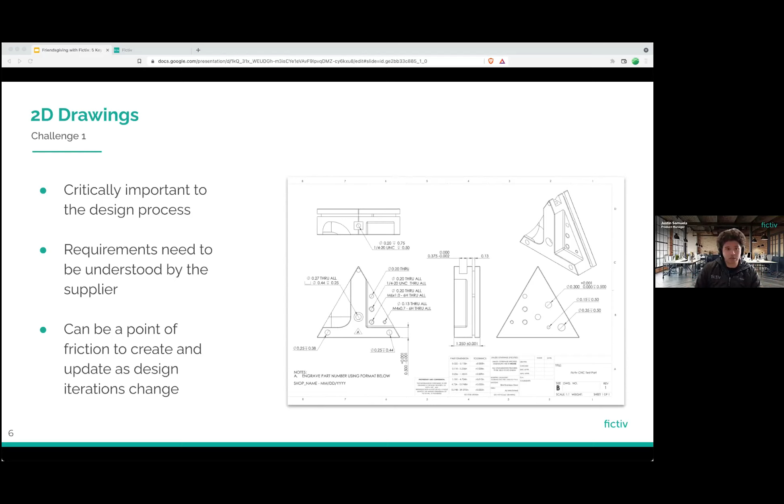Based on this understanding of drawings and their importance, we've been working to improve the drawing support that we've already had for a long time. Throughout this year specifically, we've added the ability to view, generate, and annotate drawings right within the Fictiv platform. Annotations are great for the times when you may have forgotten to include something in your drawing, or want to remove a requirement that's perhaps causing some difficulty—maybe increasing cost or lead time to a level that's not right for you.

Generation is a great tool for those times when you haven't created a drawing yet in your process, and you need to call out maybe a tolerance you've overlooked, or realize needs to be included in a drawing, or maybe something simpler like a thread detail, or you'd like to request some sort of post-process. Conveniently, when you marry these two things together, you can generate a drawing directly from your 3D model right on the platform, and then annotate it and get that quoted. So just trying to make things simpler.

But all of these things are meaningless in some ways without properly understanding what's in a drawing. As a result, Fictiv has had a capability that we've been using since 2018, which is that we're actually analyzing 2D drawings to detect requirements and details. This allows us to actually understand the drawing. This helps ensure the quotes are accurate, but most importantly, it helps prevent delays in the manufacturing process for things that may not have been accounted for if you weren't looking at the drawing.

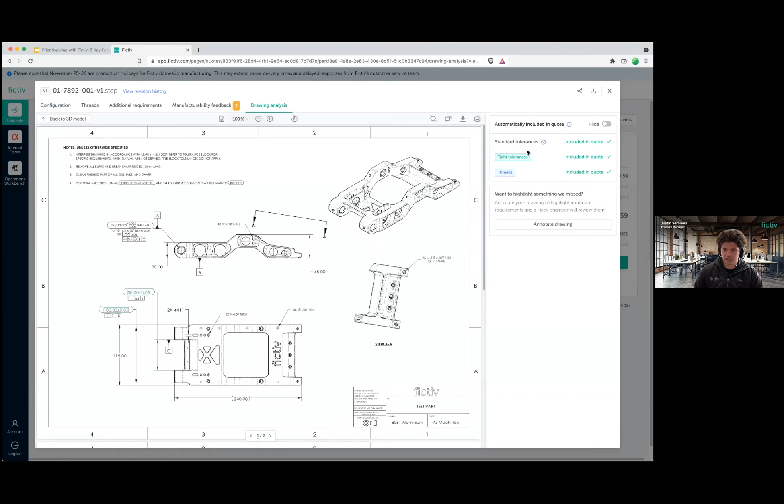Specifically, where we've got the technical drawing section over in the right-hand column, you can see that stuff is now in green. It says your drawing has been automatically reviewed and your part is ready to purchase. It's also got this button here calling your attention to it, which says review the drawing analysis. If I click on that, it flips over and shows me some of the things that are now included—explicit callouts to say standard tolerances are included, tight tolerances are in this green box type, and threads are in this blue box type, and all of those things are included and accounted for in your quote. If you're ever missing this, you can always get to it from the drawing analysis tab up top.

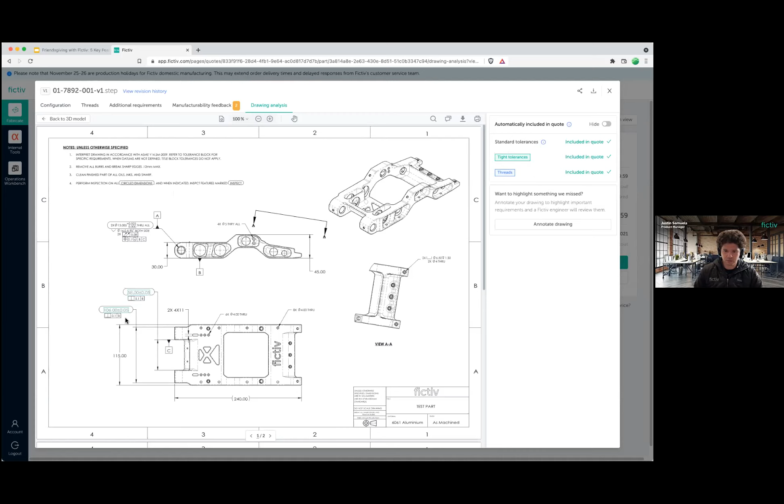But if I now look at my drawing, there's some new things here. You can see that we've got a green box around these tolerance callouts, which are highlighting tight tolerances that we've detected in your drawing. And if I scroll down further, not only do we have more tolerance callouts, we've got threads that have been detected.

All of this is meant to show you some of what we understand from your drawing. And we'd like to make sure to highlight that if there's something we missed, we direct you to annotate your drawing. You can do all the traditional annotation features—arrows, lines, circles, different color options, that sort of stuff—to actually annotate a drawing. Once you request it, it'll get reviewed by a Fictiv manufacturing engineer, just to make sure that everything is A-okay and as you want it.

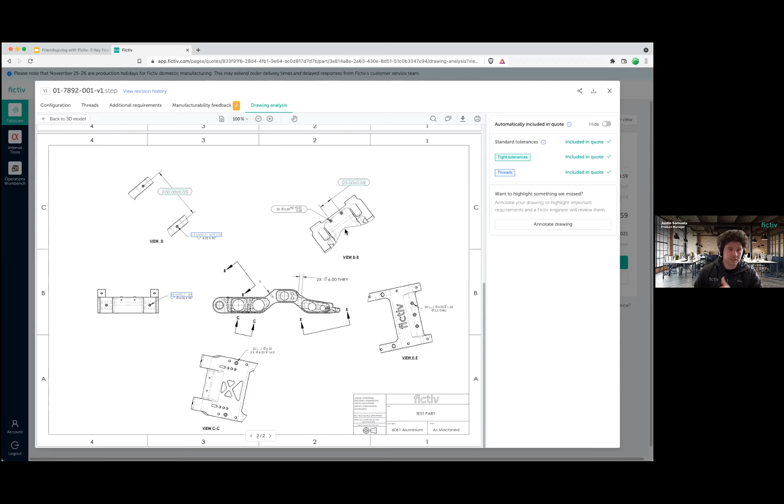Now, I'm going to highlight one other detail that's included in this drawing over here.

In this instance, you can see that this technical drawing section is highlighted in an orange color to call your attention to it. It says additional requirements were detected in your drawing that require configuration.

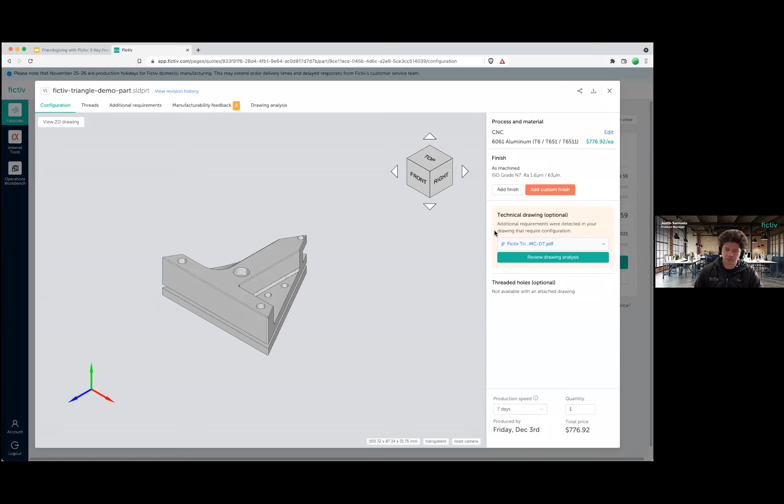If you click on the drawing analysis button, you can see that we're calling out that we detected a COC and a material cert in your drawing. Right from here, you can click to add those to your part. If I do this quickly, you'll see what happens.

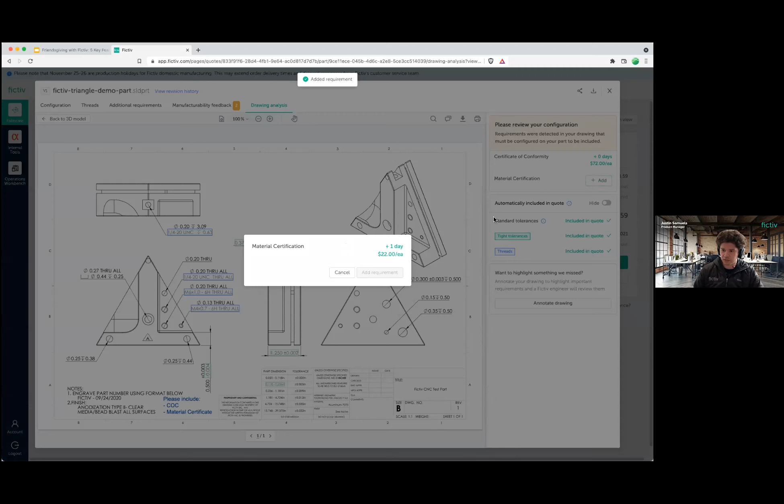Now this turns green, and that's all great to make sure we've accounted for everything. If we go back over to the configuration tab, you can see that this is now saying your drawing is automatically reviewed and your part is ready to purchase. So you're all squared away.

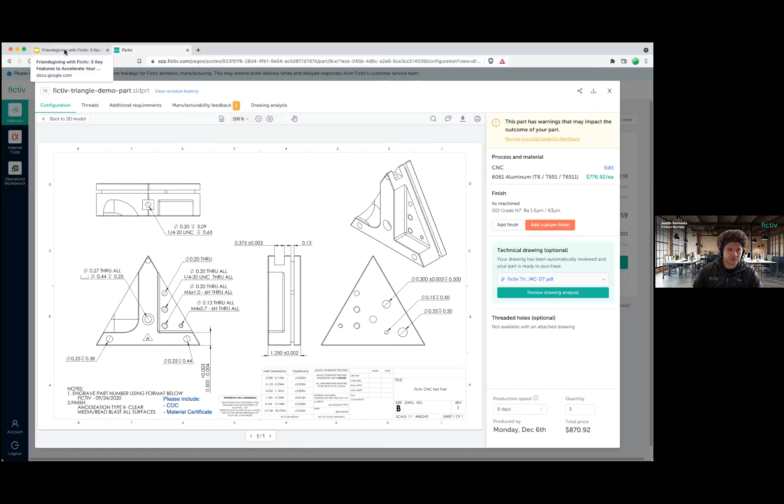So that is the new drawing analysis feature. With that, I'll jump back into our presentation and we'll keep on rolling. If you have any questions about the drawing analysis feature, how it works, feel free to put those in the chat and we can come back to them when we get to the Q&A portion at the end.

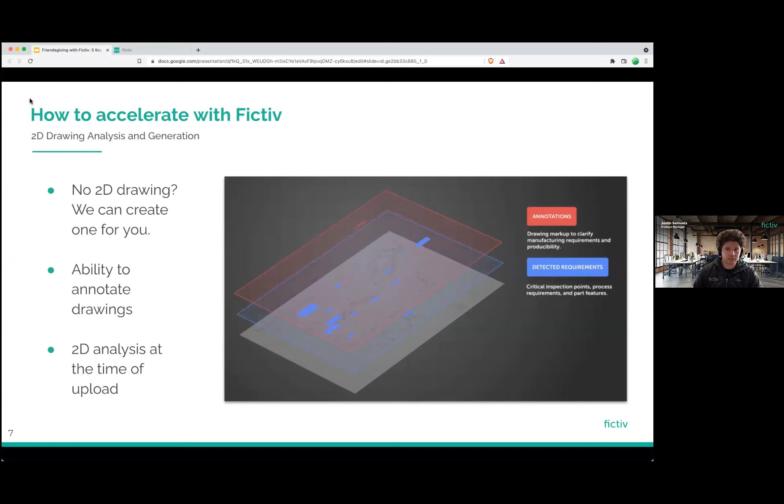Next up, we've got IP security. So I'll hand it over to TJ to take us through that. Thanks, Justin. Very good stuff on the drawing analysis feature. Happy almost Thanksgiving, everybody. I'm TJ, with the technical customer success team here at Fictiv.

The first problem I wanted to talk to you about today is one that rears its ugly head regardless of whether you're an engineer, purchaser, GSM, or even an executive, and that is the security of your company's intellectual property. The key here is trust. If you have one supplier you've worked with for years, you have faith that they have the best interests of your IP at heart. But when you're sourcing production out on the level of a whole BOM, you're going to be sending your sensitive IP to who knows how many different suppliers, some of which you may never have worked with before. So this process carries a ton of risk.

From talking with our customers, we found there's a lot of distrust when using digital manufacturing platforms such as Fictiv. Many of our customers even have compliance processes set up to ensure they're using suppliers who can prove a certain level of cybersecurity implementation. That's why earlier this year, Fictiv embarked on a company-wide initiative and got SOC 2 certified, which makes us an industry leader in IP protection, so that when you quote and order parts with Fictiv, you don't have to have your guard up. So if you can go to the next slide.

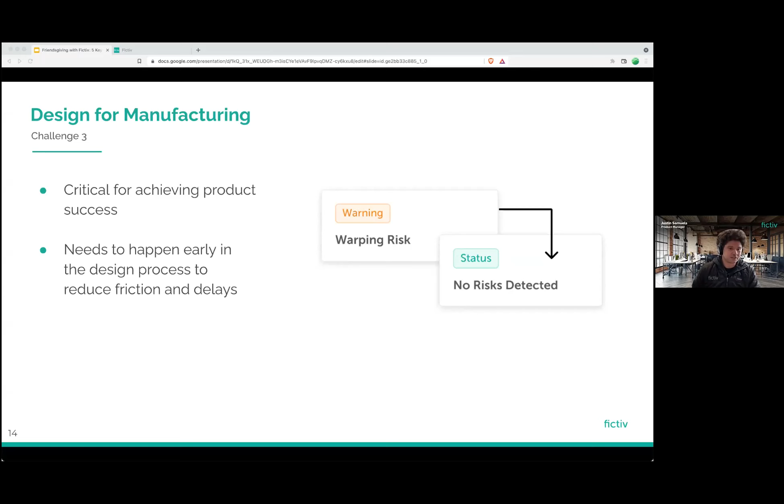For some other platforms, DFM is the opportunity to get users to conform their design to their specific limitations, meaning a lot of design concessions. We're trying to support your design with the fewest number of trade-offs or concessions possible, by trying to meet your requirements and standards with a high degree of manufacturability.

This helps aid in the process of getting a product ready to scale with a DFM that is closer to the end state. And furthermore, this pulls elements of the DFM process forward and aids in thinking about details such as quality that may otherwise be a secondary or tertiary concern at the prototyping stage.

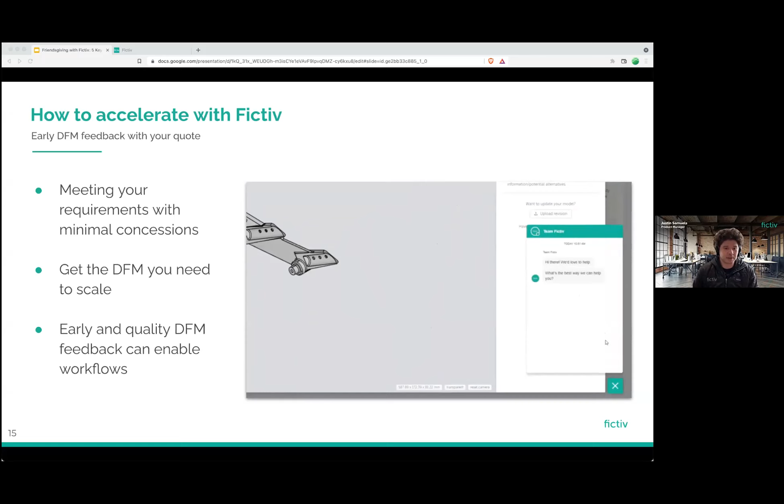While much of Fictiv is oriented towards this automated experience—DFM on platform and automated things like quoting—we also realize that guidance is key. You still need somebody with lots of experience to help you sort through a lot of these trade-offs. We know that, so we have an entire team of manufacturing engineers who can support in evaluating a lot of these things.

And you can always reach out to us through the chat that's directly on the platform, which you can see in this GIF here, and how you do that. But you see this come through in many other ways as well.

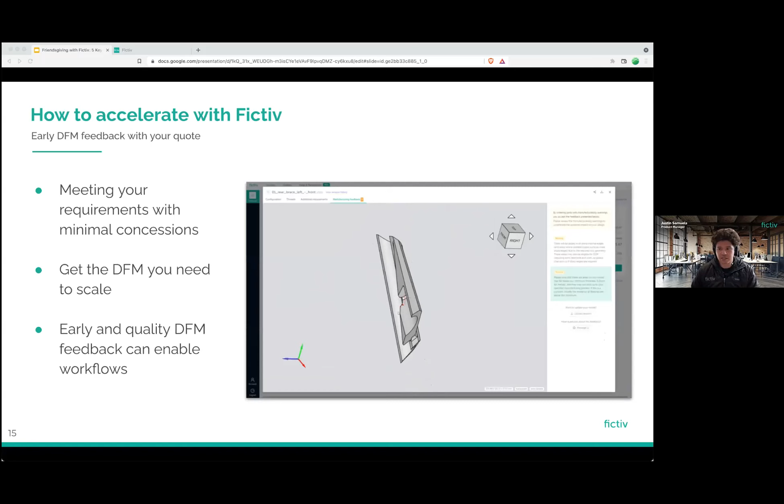This team is experienced across all manufacturing processes, including experts with deep knowledge in areas like injection molding, part design, tool design, scalability, and the like. We've got a few here, Kyle, Cameron, Bill, all on our team that work deeply in the injection molding realm. If any of you have received our injection molding DFM docs that include part level detail analysis, all that's made with a lot of help from these engineers that work directly for Fictiv and help guide all of you through the entire process.

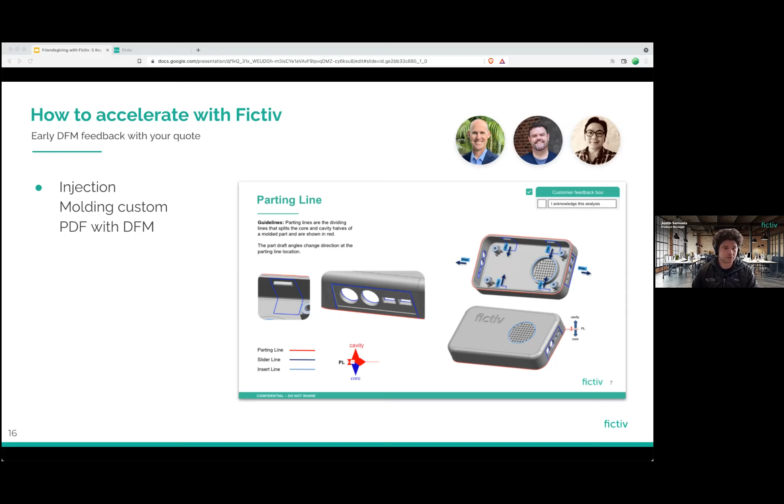So next up, we've got time spent sourcing. TJ was alluding to some of this before, but I'm also intimately familiar with it from some of my time in prior jobs. I know it takes a lot of time to obtain quotes from various suppliers and meet your criteria, cost, lead time, quality, etc. Even more so, it's hard to find new suppliers, right? And TJ was talking about that, how we bring people in. And even if you have a good selection of suppliers, they can be capacity limited. All of this takes time. You have to sort through all of this, which takes engineers and other team members away from the work that they're really meant to do, the stuff where we really add value.

And so we're trying to make this all a little bit better. We're doing a number of things to help reduce the time spent doing those sorts of tasks. First, we take on the burden of finding and vetting suppliers for capabilities, capacity, quality, security, and more. And we have a long list of them. We've got over 250 suppliers that we work with, and that reduces capacity bottlenecks that you can run into when you only have a few suppliers. Even more so, it prevents the problem of, oh no, that's my one supplier for X. Like maybe it's some specific finishing requirement. Maybe it's who knows what, EDM or passivation or who knows, plating.

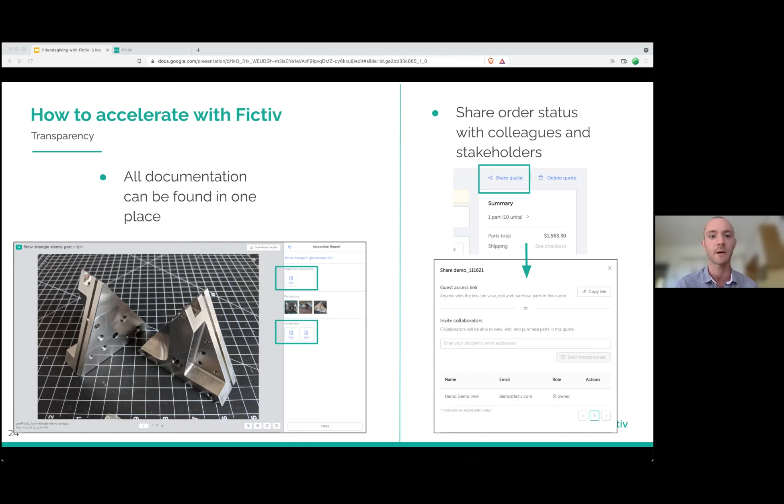And that's all I had to say about post-order transparency. I think that pretty much sums up all the points we wanted to make. So just some key takeaways here to sum everything up: obviously 2D drawings are critical. Our bread and butter is these really high complexity parts that have 2D drawings.

To highlight that, the drawing analysis Justin touched on is really exciting, a fun new feature for you. Number 2, protect your IP with our SOC 2 certified systems. We want to make it clear there shouldn't be any worries on your side about using us as a digital manufacturing platform. Number 3, obtaining DFM feedback is obviously very key to mitigate any issues.

Once you get closer to DVT, PVT, up to production, you want to nail those down as soon as possible in that process. And then to save time sourcing with our flexible production options, Justin showed you the really cool quote level lead times, which is going to make things a lot easier and definitely make more sense than configuring everything individually.

And then tracking your parts post order with our transparency features, also very cool. So yeah, I think that's it for us. I think now is when we pivot into Q&As. I know we have at least one. If you guys have any other questions, it doesn't even have to be about any of this, could be about Fictiv in general. Happy to answer anything you guys are wondering.